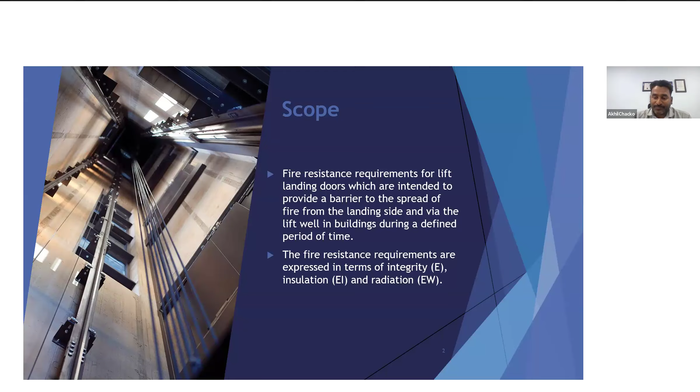So if we see the difference between normal door testing and landing door testing—whether it's BS 476 Part 20, EN 1363 Part 1 general requirements, or EN 81-1 versus EN 81-58—the major difference is in the measuring of integrity. When we test the door with BS 476 Part 20, 6mm gap gauges or 25mm gap gauges and cotton pad come into play, where integrity is measured based on those requirements. But in EN 81-58, we are not measuring integrity with gap gauges or cotton pad.

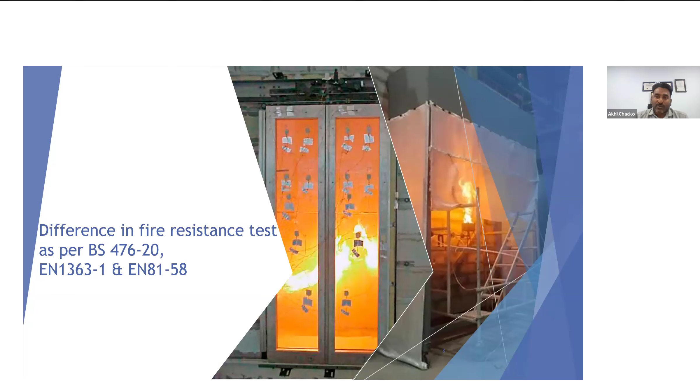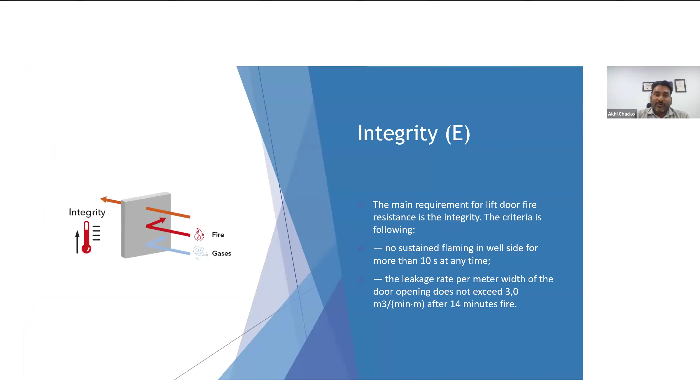Instead, it is a comparison of carbon dioxide leakage through the door into the canopy and measuring system. So let me explain what integrity means here. In this standard, integrity is measured by sustained flaming occurring for 10 seconds at any point in time, which is called a failure of integrity. Also, the leakage of carbon dioxide through the door opening should not exceed 3 cubic meters per minute, or its equivalent, after 14 minutes from the start of the test. That will constitute an integrity failure.

Then we measure thermal insulation, where thermocouples—if it's an insulated landing door—are placed on the unexposed side of the specimen. If it measures 140 degrees Celsius rise on the surface of the specimen, or if the size of the specimen is greater than 300mm, then it's 180 degrees Celsius or Kelvin. Or if it's between 100 and 300mm panel width, then it will be 360 Kelvin or degrees Celsius. Once this threshold is reached, that constitutes the insulation failure of that particular specimen.

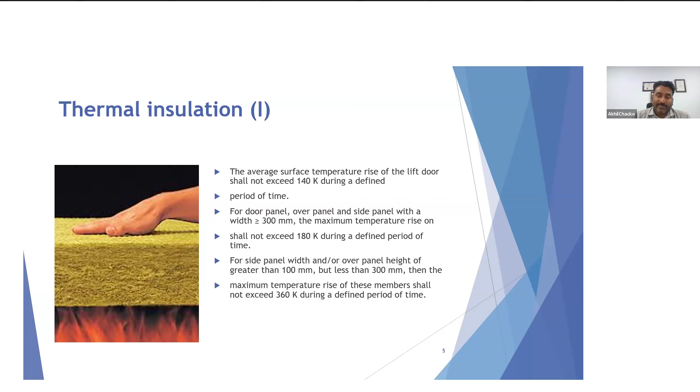Then we have radiation. So at any point in time, if the radiation exceeds 15 kilowatts per square meter, that is the radiation failure for that particular specimen.

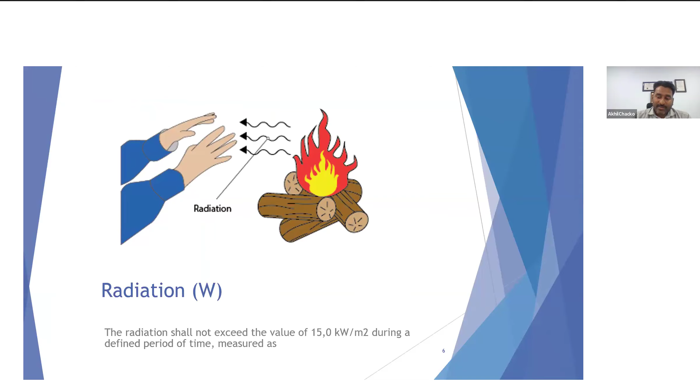So then we have the classification for this, which is expressed as E with respect to time. E stands for integrity, I for insulation, and W for radiation. If a specimen passes for integrity 120 minutes, insulation 30 minutes, and radiation 60 minutes, it will be classified as E120, EI30, and EW60.

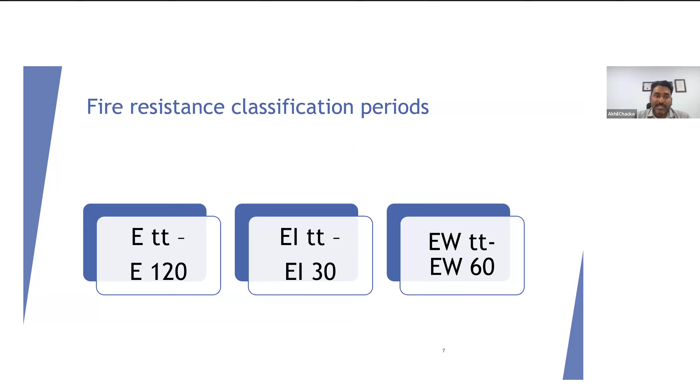If we see the testing procedure, we can split it into 5 parts. Part number 1 is the pre-test arrangements for the test, then pre-test flow verification before the test, instrumentation on the sample, then testing, then reporting. These are the parts that we will follow for the landing door testing for fire resistance test.

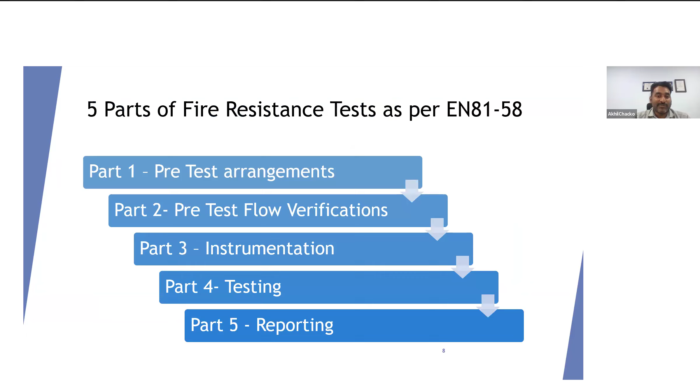As per EN 81-58, the first part is the construction of the supporting construction itself, and also the installation of the landing door to the supporting construction. Then the final setting of the sample, then the pre-test examination will be part 1 of this test.

The lab is supposed to provide a frame where the landing door is installed. Once the sample is installed to the surface of the supporting construction, the frame will be fixed to the furnace, then we will be doing the test.

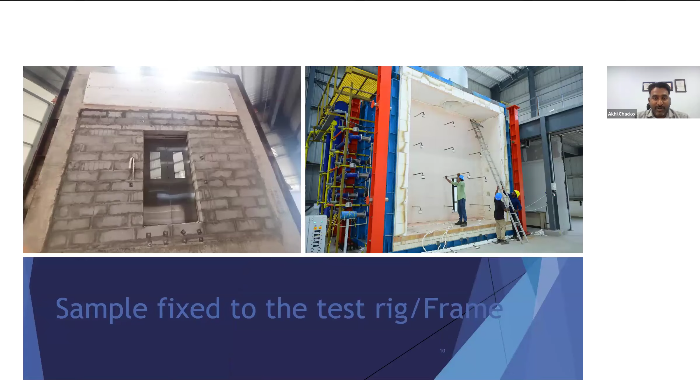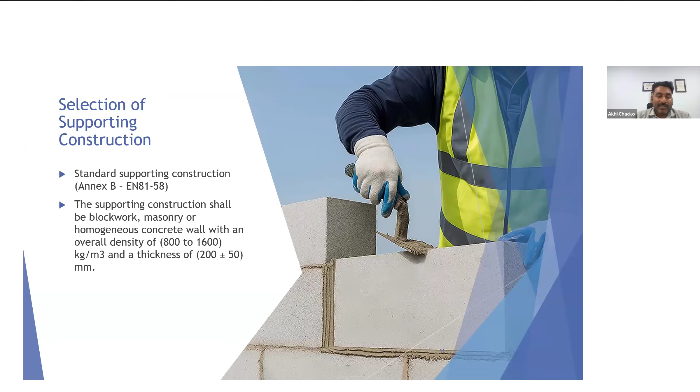When selecting the supporting construction for this landing door, the standard says to choose bricks ranging from 800 to 1600 kilograms per meter cube density of supporting construction. That can be aircrete blocks or concrete blocks, but whatever falls within this range has to be chosen for testing. The thickness can vary from 200 plus or minus 50 mm.

Once those are chosen, in this standard, if this standard supporting construction is used, then the landing door can go into any type of supporting construction greater than 600 kg per meter cube density material at site.

Then a minimum exposed area is provided during the test. The minimum exposed area where the sample is installed should be at least 200 mm, and this supporting construction area should be subjected to fire.

If the landing door fails on supporting construction fixtures or anything, that is actually a compatibility issue between the supporting construction and the landing door. So the material chosen to fix the supporting construction and the landing door also needs to be chosen wisely.

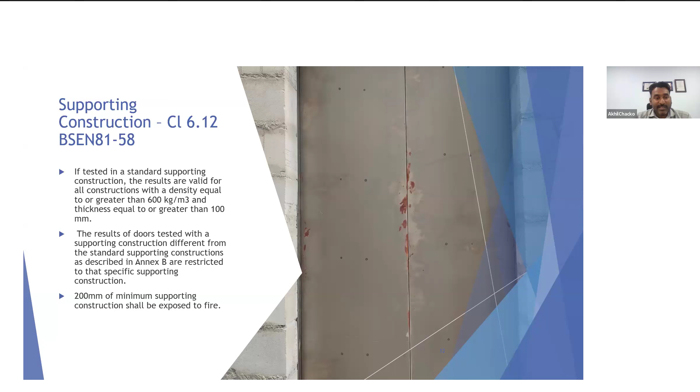Before the test, we take out all the material list used in the construction of that particular landing door, and the drawings are submitted to the laboratory in charge. They have to verify the complete details presented in the drawing with respect to the installed sample. If there is any deviation, that is supposed to be edited, and whatever details are missing also has to go into the report and drawing, which becomes the final report for this testing.

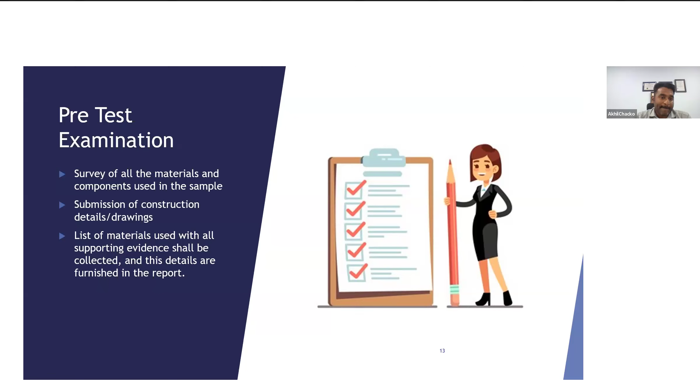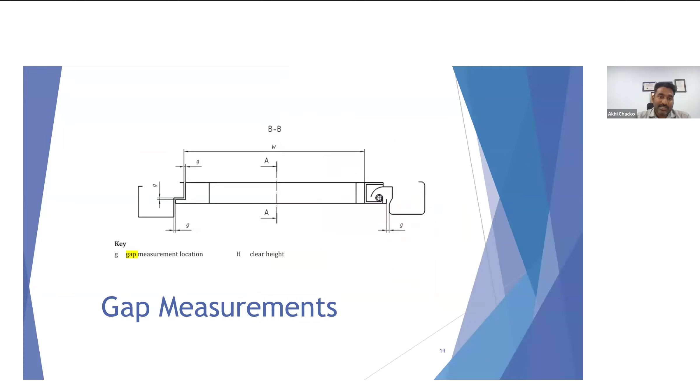Before the test, the gap measurements as per the standard should be taken. You can see in the presentation the gap measurements shown as 'G' - all those are measurements we are supposed to take once in the closed position of this particular landing door.

Prior to the test, a functionality test should be done on this landing door, opening and closing to at least a minimum width of 150 mm. If possible, it has to be opened completely and closed before the test. Once it is closed, no adjustments are done on this particular sample, and it should be directly put into the testing.

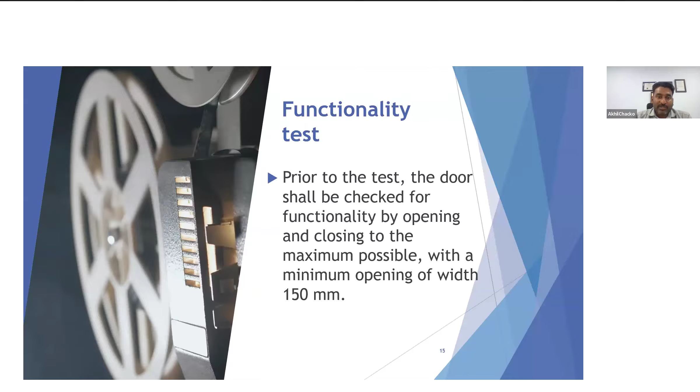Then the second part is the verification of gas flow measurements before the test. As I told you, in EN 81-58 the integrity measurement is not directly done with gap gauges or cotton pad. It is based on the carbon dioxide leakage happening through the door from the furnace into the measuring system. There is a canopy system given in the standard.

If you see the standard, there is a particular canopy system provided, and before the test, a verification of the flow measurement is done. This constitutes a burner and propane gas used to burn the burner, and at least 15 minutes of verification process is done. First 10 minutes will be preheating of the entire system, and 5 minutes will be the measuring time of flow systems.

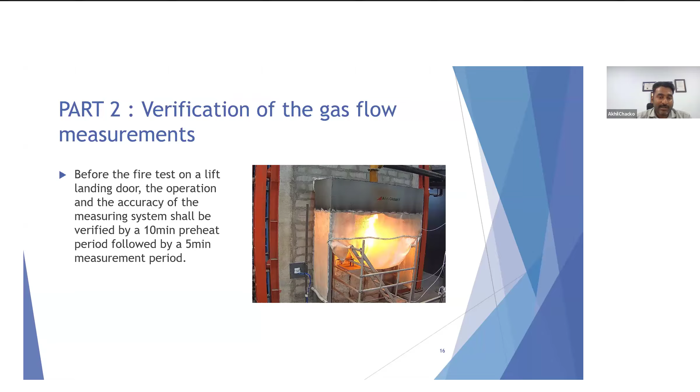You can see in the presentation this is a videograph of the calibration process done before the testing.

During the measurement, we send the propane gas into the burner, and this is burned at a rate of 1.36 liters per second. The standard says this produces carbon dioxide of 0.25 meter cube per minute.

This carbon dioxide is sucked by a blower outside, and we measure how much percentage with respect to standard, which comes into 10% of the measuring system. So we adjust the blower and make sure that the flue gas produced through burning propane gives 0.25 meter cube of gas through the system.

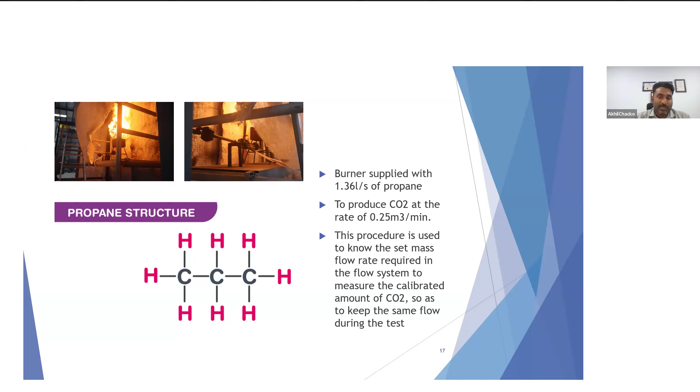Once we measure this, we make sure that the system is running correctly. From there, the blower is set at that particular RPM to give a constant flow, and the test is started.

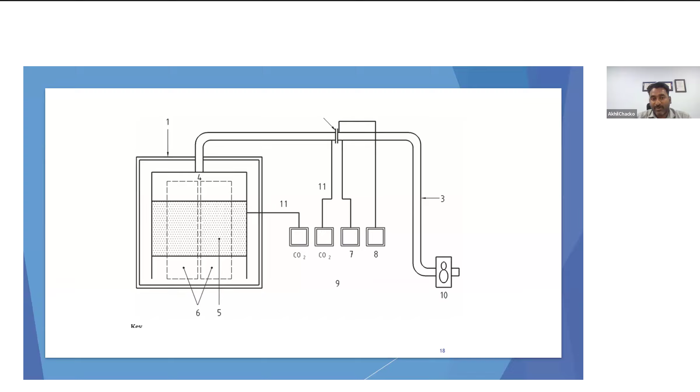You can see from the standard diagram that is given to measure the entire setup. We have carbon dioxide sensors to measure the carbon dioxide from the furnace and inside the flue gas passing through. Then we have the differential pressure measurement system to measure the flow rate of gas flowing through this system. Then the blower to have the differential pressure between the canopy and the outside environment.

Then we have other measuring systems, the barometer, thermocouple, all those things to have the correction factors for the flow measurements. Then part 3 of this test is the instrumentation of the sample, which we can split into instrumentation of the furnace and instrumentation of the specimen.

For instrumentation of the furnace, we have differential pressure manometers kept to measure the differential pressure between the furnace and outside environment. The standard says to keep a minimum of 2 Pascals, and it is completely a positive pressure test. Only then can the flue gas inside the furnace move out through any leakage point in the door, passing from the furnace to outside and into our measuring system.

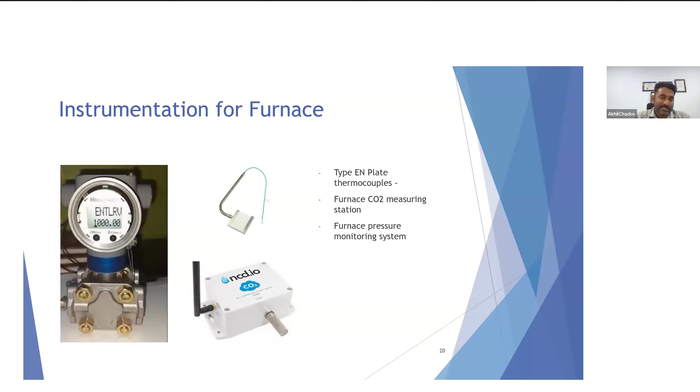We have the thermocouples to measure the temperature, the time temperature curve. Then we have the carbon dioxide monitoring system inside the furnace and also outside the system. Inside the furnace, we maintain the time temperature curve with respect to the standard. It is basically a cellulosic curve.

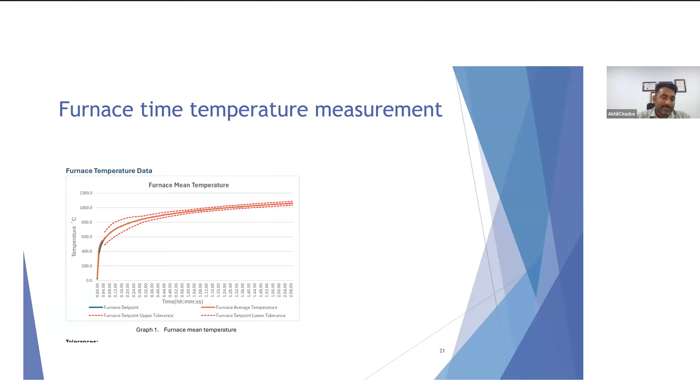So once the test is started, the furnace should run on the time temperature curve within the tolerance prescribed in the standard. Then we have the pressure gradient that is kept inside the furnace.

As I told, this is a positive pressure test where the landing door is subjected to a positive pressure from the sill to the top of the specimen. So the pressure gradient should be 8.5 Pascal.

And... am I audible now? Hello? Yes, you're audible, Akhil. There was a power loss, so I was just confirming it.

So the differential pressure gradient is maintained throughout the vertical gradient inside the furnace.

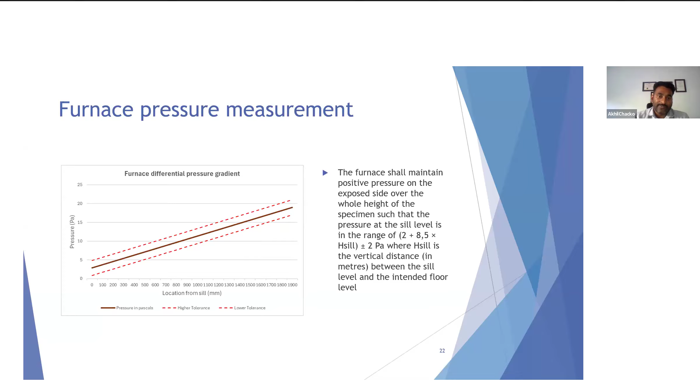Then we have instrumentation of the specimen, that is the canopy for gas collection as per the standard. Then we have the flow measurements as per the requirement already set during calibration. The entire setting should be there when we start the testing.

Then we have the gas cooling and drying system to collect the carbon dioxide, where the carbon dioxide, flue gas, and the air sucked from outside enter, and this is going to be very hot. The sensors being used cannot accommodate that temperature, so the cooling system and drying system should be there.

Then we have the gas flow measurement system to measure the gas flowing through the entire system. Then we have the carbon dioxide level monitoring station, where the carbon dioxide escaping from the furnace through the landing door into the measuring station is measured and monitored. Then the sample deflection sensors, where the deflection of the specimen is recorded.

Then we have unexposed side thermocouples in case of insulated specimens. Then we have heat flux sensors to measure the radiation coming out through the landing door during the test.

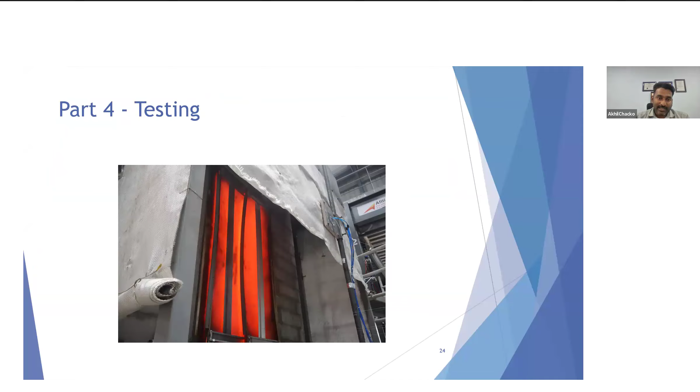During testing, when we start the test after calibration, we have the measuring systems in place. The criteria for integrity measurement would be 10 seconds of sustained flaming. If the flame is seen and stays for 10 seconds at that location, that makes an integrity failure on the specimen. Or a leakage rate of 3 meter cube per minute per meter after 14 minutes of the test will constitute an integrity failure.

There is a correction factor given in the standard, to which we compare the pressure and the standard pressure of 20 Pascal, and the pressure inside the furnace with respect to the measured volume of the gas. From that, the carbon dioxide leakage is extracted, and the value is compared with the value of 3 multiplied by the width of the specimen.

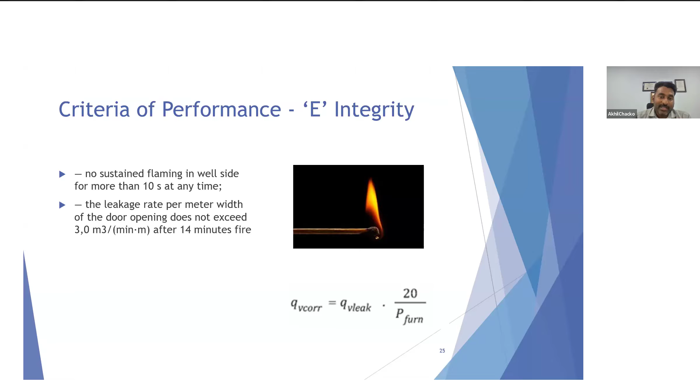Once it exceeds 3, the multiplication factor of width and the standard of 3 meter cube per minute per meter, then that makes the failure of the integrity.

In case of measuring insulation, we keep the thermocouple on the unexposed side of the specimen and measure the 140, 180, and 360 degrees Celsius temperature that is passing through the system into our thermocouple. Then that makes the insulation criteria satisfied.

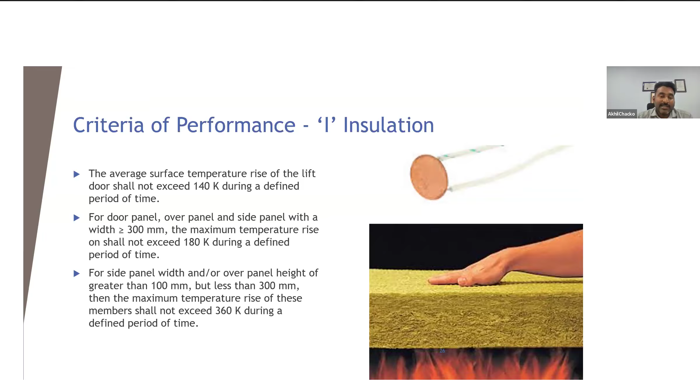Then the heat flux is measured with a flux sensor kept 1 meter away from the specimen, and the radiation value shall be limited to 15 kilowatts per meter square during 1 hour duration or 2 hours, but the classification is only up to 1 hour. Once the 15 kilowatts per meter square criteria is exceeded, that is the radiation performance of the particular specimen.

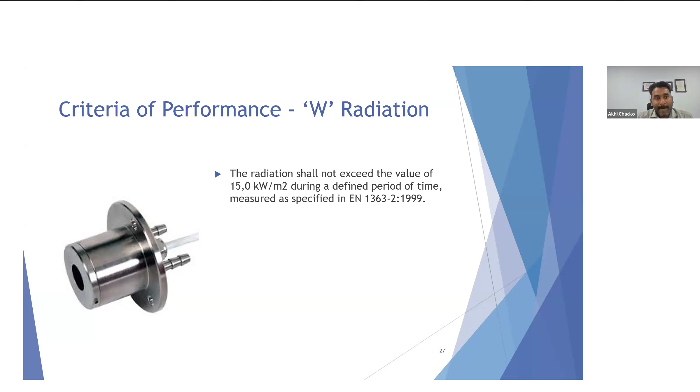Then the 5th part is the reporting, which is very important. Once we do all the testing and take out all the data, the reporting part is very important, where we have to give the details of leakage through the door during the entire course of the test, the time duration when flaming has occurred if it occurred, the deformation of the door, radiation emitted through the door, and unexposed face temperature if it is measured, and what kind of classification this belongs to with respect to the data collected.

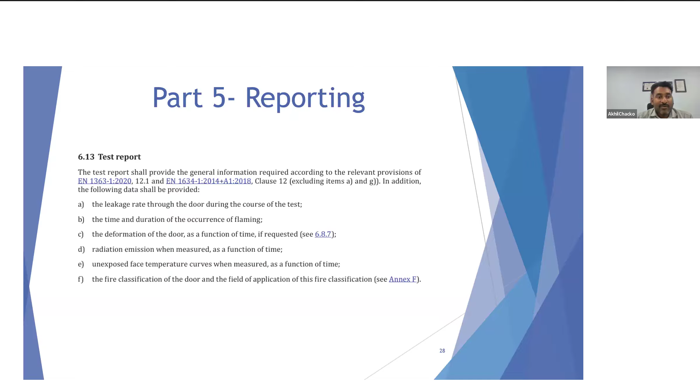Apart from these details in the reporting, we are also supposed to give the details provided in EN 1363 part 1 along with these. That includes the name and address of the sponsor, the date of the test, the reference numbers, what kind of product it is, and the manufacturer details of each product.

So if a door is being tested with a particular material that has been bought from market or supplied from some other company, the company name with the complete details of that particular model or product used in the landing door should be there in the report, and that has to be furnished as data.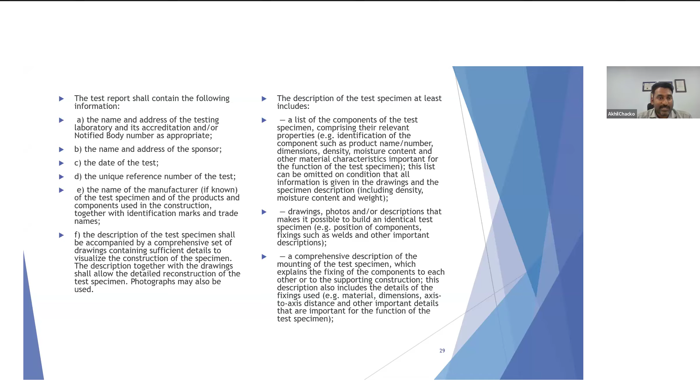Then what kind of supporting construction is used for the testing, the photographs and description of the specimen, and what was the fixing mechanism used during the test. All those data are supposed to be there as per the standard.

Then we have a description of standard supporting constructions, so the thickness, the material used, the density, all those things go into the report. Then the preconditioning if there is anything, then the statement of laboratory involvement if there is a selection, sample selection or anything like that, then that should be furnished in the report.

Then the drawing, which is very mandatory to be included in the report, where it should have the complete detail of how the sample is, so that any client who is using it at the end user can easily know that the same specimen tested in the laboratory is being used in site applications also.

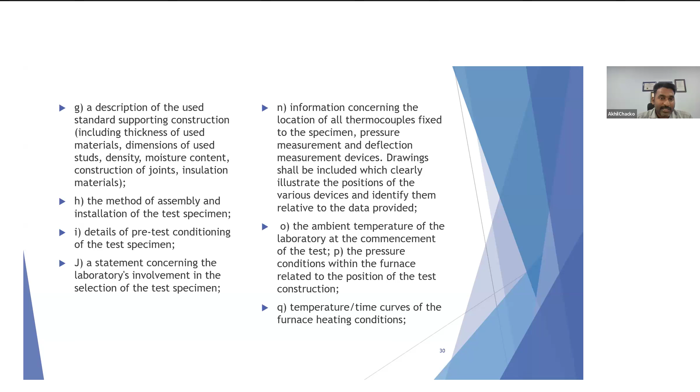Then the ambient temperature, time temperature curves, furnace heating, the carbon dioxide data, all those and the results, everything is supposed to be there in the report.

So this is the time temperature curve that will be provided after the test. Then we have the differential pressure measurement that has been taken during the test for the entire duration.

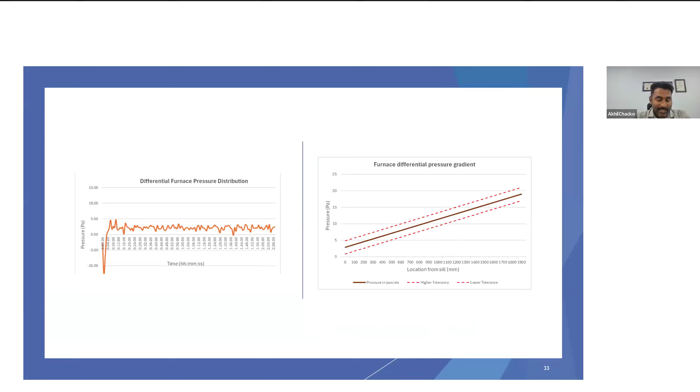Then we have the deflection. The deflection sensors are kept at the specific points demonstrated in the standard, and the deflection data in graphical or data form is supposed to go into the report.

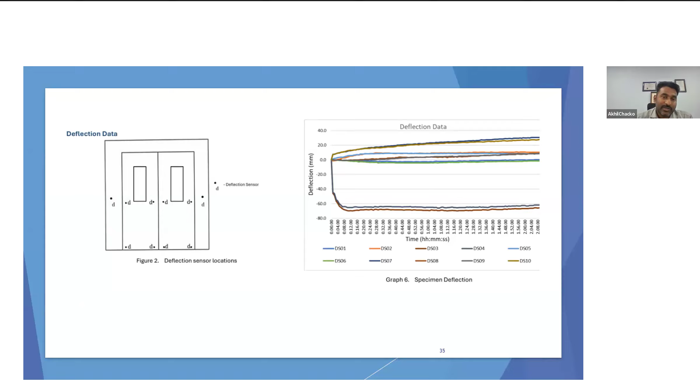For example, in the other case, when we are using a gap gauge or gap gauges or cotton pad to know the flue gas passage from the furnace to the outside through the landing door, an indirect way is used: the leakage of carbon dioxide from the furnace through the landing door to outside is used as data to find the integrity, how much opening has happened in the system. If the opening is more, the more carbon dioxide is going to come from the furnace to outside.

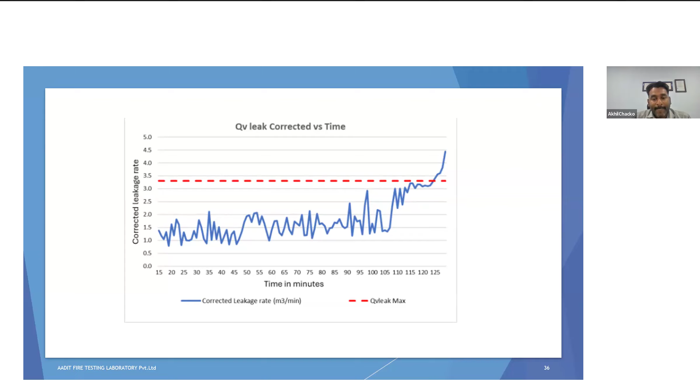So that is used as a value to measure what is happening into the system. This is an indirect way of measurement in this case, in EN 81-58.

Again, the field of direct application comes where doors are being tested. Any sizes less than the particular door that is being used for testing can be used at site. Also, the width can be increased up to 30% of the tested door. After the extrapolation value, if the value is within the limit, then a 15% increase in height can be used at site as a field of direct application.

Then points A and B can be used together. If the supporting construction is used within the specified range as per the standard, then this particular material can go into any type of supporting construction. Or if there is any supporting construction that is particularly used only for the landing door, then the landing door can go only into that kind of supporting construction at site.

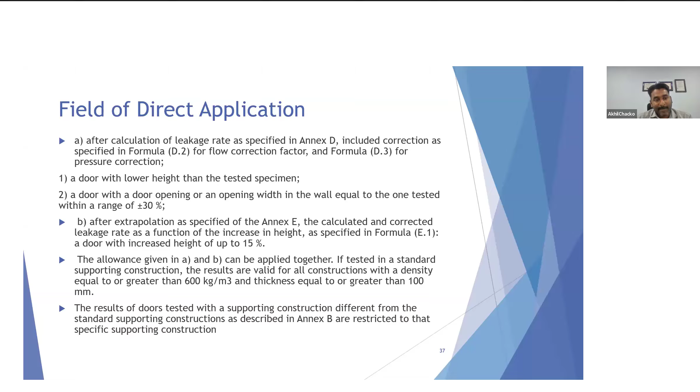So with this, I'm ending the brief presentation on EN 81-58. Now, if there are any questions, I can take the questions. And thank you for listening.